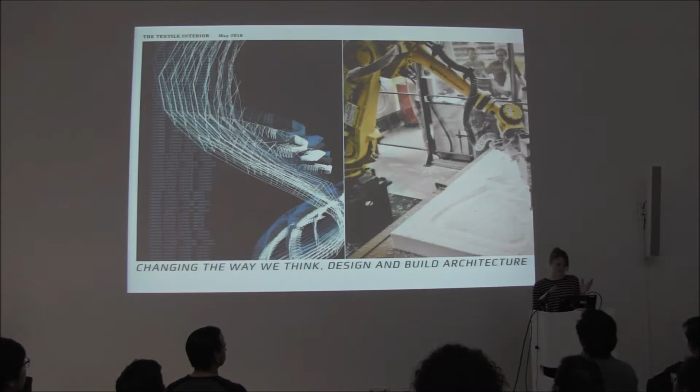What we look at in CITA is how computers are changing the way we think, design, and build architecture. And the thinking part is really important. Often our field becomes very technological, very much about optimization. We are given tools like this. We're shown BIM as a sort of paradigm of just bettering the existing practices.

But I believe that there's much more at stake. For me, we have entered a new realm of representation, and we're standing at the cusp of something that is just as important as the invention of perspective. So in a way we have entered...

Do you want me to go closer, or? Okay, you decide. It's a little bit distracting.

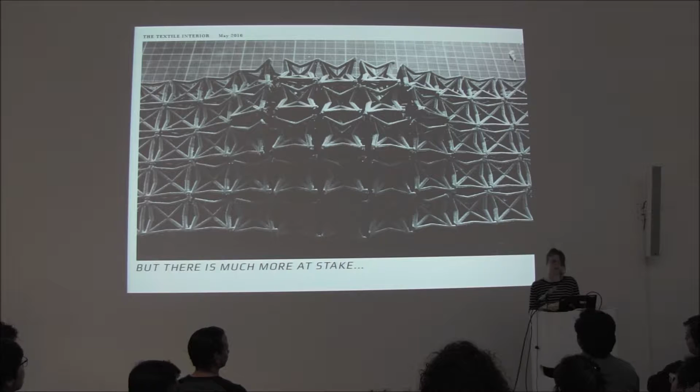But we have entered a sort of period of reinvention of our practice, which I'm personally very excited by. We work in a practice-based research method. We build a lot of one-to-one installations, demonstrators, and this is really through an idea that technology is something we make rather than something we use.

So I believe very much that architects are particularly prone and good at being given a tool and immediately breaking it, finding the edges of it and deciding to misuse it. And I think the only way you can enter those practices is by doing. And so the making practice in CITA has been fundamental to our evolution.

We teach, we do a lot of workshops. In these workshops, we teach the way we research, so we embed students in the same way as our own practice. And we develop questions. Sometimes they're questions we don't know, like, could knitting be an interesting paradigm for architecture? I did a workshop on that 10 years ago, and I've been working with it ever since. But it started as a workshop.

And sometimes it's the other way around. I come with a mature research project, I open it up for students, and I see how students might navigate the same territory of concepts and tools and ideas.

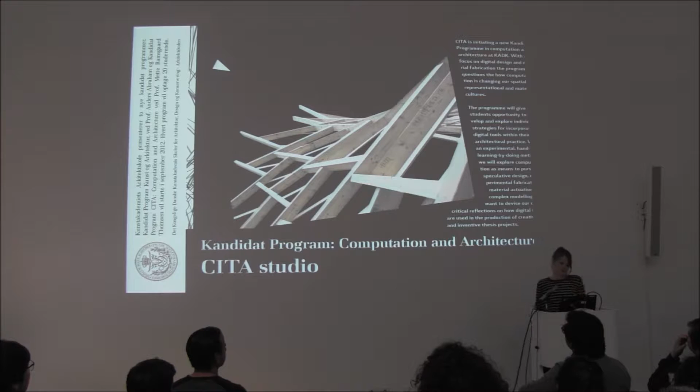We also have a master's program, which I won't pitch here. So anyway, this is a little bit repetitive from the talk in Berlin, but maybe it's a point of departure.

Why this interest in textiles and architecture? Of course you could say there are two central traditions, maybe the tent and the tapestry. The tent as the textile as a constructive membrane, structural skin, and the tapestry as that which lines the space and encultures the space. And these two traditions, I think, are very interesting.

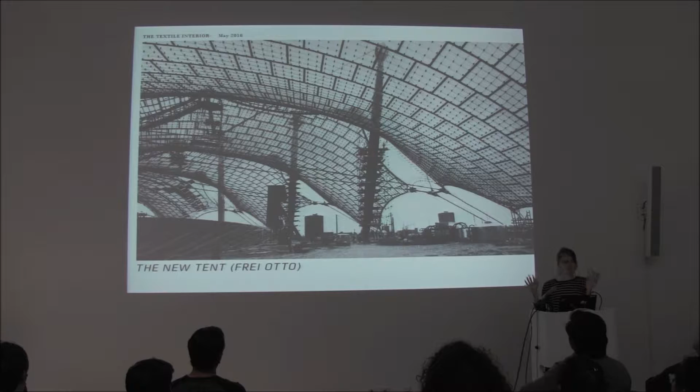We could think of the new tent. How could the tent be constructed today? And perhaps also the new curtain. And obviously we have excellent practitioners working with these ideas around us. For me, a very important interest in textiles is this idea of the tapestry.

So this project, which is ongoing, but maybe I started 6 years ago, started with a trip to the library. I wanted to work with an idea of textile history in architecture, and I thought, I'll just go and find a book which says where I can see all these textiles. And I opened all the books, and I realized, obviously, when I look at Villa Rotonda or Villa Medici and so on, they're empty. There is no evidence of any inhabitation.

And of course I knew this, but I had somehow forgotten that the life of buildings and how we experience architecture is eroded from our architectural history. So in my own little way, I've been trying to construct a history of textiles and architecture, and enjoying thinking about textiles as a particular narrative in architectural history, which is somehow parallel but also introducing other kinds of ideas.

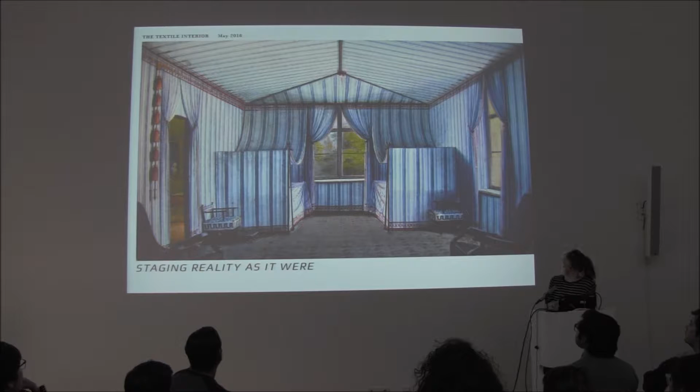They're exotic and scenographic. Schinkel is a really interesting person for thinking about textiles, because with his tradition of thinking about these very large textiles, Schinkel actually visited the coronation in Paris and was very aware of Percier and Fontaine's work. And when he did these textile rooms, which are now very famous, for Humboldt in Schloss Charlottenhof and Queen Louise, Napoleon had slept in her bed. He invaded Berlin, slept in her bed, and when she came back, she thought, maybe I need some redecoration.

I just think that's so, if I'm going to invade a country, I'm going to sleep in the Queen's bed too. Yeah, it's fantastic.

Anyway, so he constructs it as a sort of scenography that we can live in, where we can construct ourselves and our own identity within these spaces. So what I bring with me into these more technological studies that I will show now is this depth of history and depth of architectural thinking, this idea of a transformative space, an architecture which is fluid, that you can bring with you from place to place, and which is rich with narrative and meaning in ways that we don't normally think of when we think of architecture as artifact. So it's this idea that I want to bring with me into these more architectural studies, or technological studies.

So I've structured the talk around these 4 ideas. Textiles as a model for architecture, the idea of a textile room, digital crafting, material design, and complex modeling. And we'll get more and more computational as we go down. So, okay.

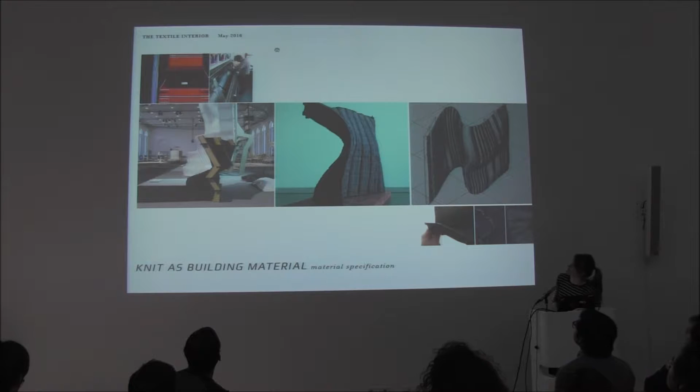And it didn't at all have the sort of textile sort of just pull a bit, and so these sort of questions became very interesting, and with it we were working on these very interesting CAD/CAM knitting machines that I'll show you a few times.

Right after that we won this competition for an interactive show in London, and we said very bravely, well, we can do this, but it will move, and it will be 13 meters long, and we'll do it in 3 weeks. And we weren't really completely aware of the complexity of it, but the idea was that it would move, but at the pace of architecture.

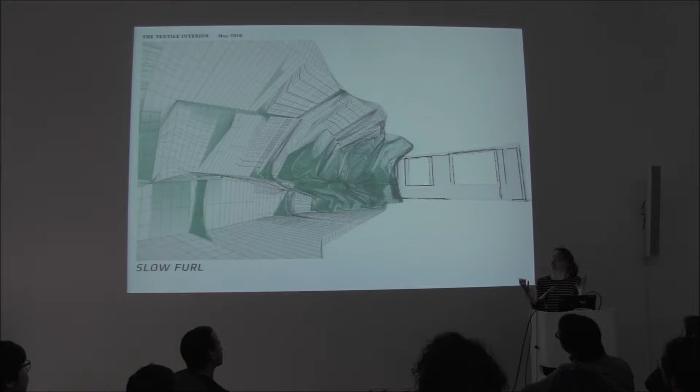So I've been working a lot with actuation and thinking about what would the temporal pace of a building be if a building was an organism. So maybe more connected to the pace of a glacier or a frozen lake; these sort of time frames are beneath our own experience. While we have an understanding of them, they're not animate.

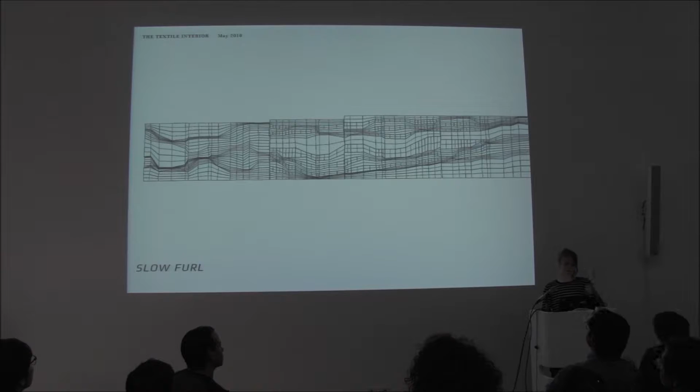So I got these guys in India actually to make me these fantastic geared motors, which had very little power in them, but were geared down to have a lot of torque. And a little bit like a sort of medieval piece of technology, it has these weird arms underneath it that are very basically just moving up and down, but because of the joint system, it becomes a complex movement.

And when we had finished the actual construction, we switched it on, and it didn't work. And it was 4 o'clock in the morning, and the opening was the next day, and we just thought, fuck. And then we thought, okay, there's nothing to do, we have to lie. We'll just say it works. Okay, went home and slept a little bit, and then I thought it works, because I had coded all the motors, and I had been planning, and I knew that it was working. I knew they were moving.

So I crawled in under this thing into this place here, and then I saw it is moving. And it is simply because when you have a rigid architecture, you can see the motors like a clock. You can see the arms moving against each other. But when you're looking at this kind of architecture, with this hyper-voluptuous skin, then we have no registration.

So here I was imagining, how could an architecture be if it was an organism? What would its movement languages be? And here it was pointing right back at me, saying, what kind of organism are you? What can you even perceive? And I thought that was an interesting dialogue.

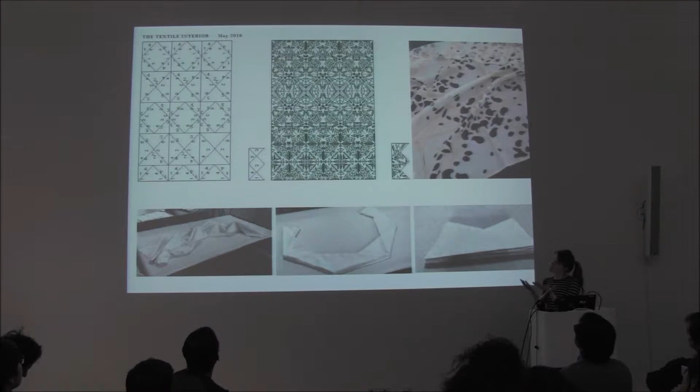Along with it, we did these studies into origami, where we folded the textiles and then created laser cut shibori forms. You know, the Japanese dyeing technique of shibori, where you're binding the textile with blocks and you're dipping it, and the water actually only goes in to the edge of the textile, creating these very interesting patterns. So we found ways of developing this, and then laser cutting the forms and laser cutting the textiles,

and enjoying the dialogues between the technique of shibori, the techniques of 3D modeling and the techniques of laser cutting. Or here in Blush, which also has a very technological study. It looks at, again, 3D modeling flounces. So it's a tablecloth for a very, very complex table. The table has several layers, and the tablecloth weaves in and out.

And then it uses placed patterns, so digital printing of these silk surfaces, in which placed pattern is in fashion, where instead of just striping the textile, you stripe it in relationship to the body, and you use digital printing to be able to make the patterns. There's a picture here. You can see how the patterns are strategically colored, so that within these very deep silk flounces the color becomes really vibrant, but on the outside it's very

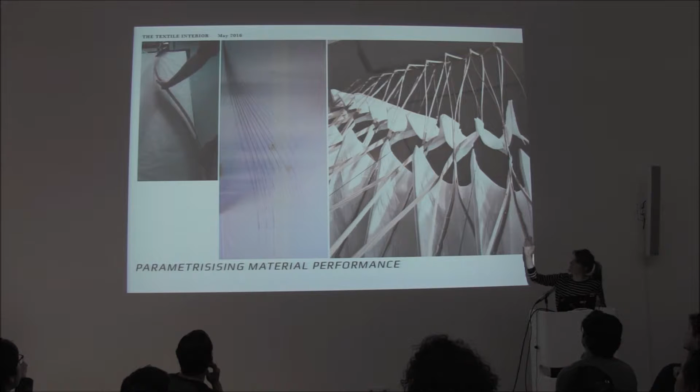But in Thicket and Thaw, what we were looking at is really trying to understand how we could make the subframe also textile. So here, very simply, bending the wood, tracing the wood, and using this as min and max parameters for a parametric model by which we can then design this structure. So we named this kind of thinking digital crafting because it holds the craft techniques and the computational techniques, and it brings these worlds together.

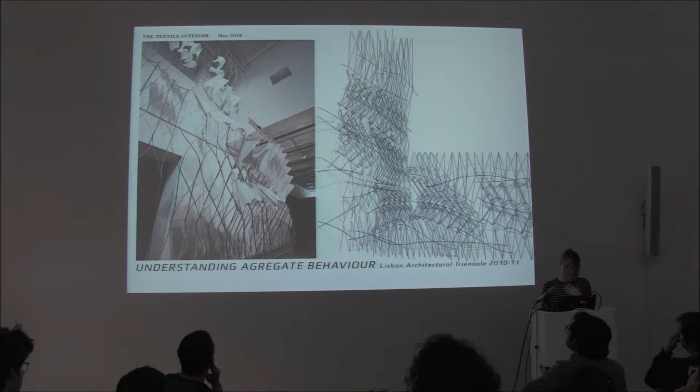We did it again for the Triennale in 2010, where we built it 10 meters high. It was really fun because at 10 meters it suddenly starts becoming not just the interior, but something that speaks back to you as a building. A little bit of digital fabrication.

But what was also interesting was that when we were making the model, we understood, okay, I'm parametrically designing the single curvature of the beam, and I understand how it's moving, and that if I flex it more, it will break, and if it's less, then I'm not using the stiffness that I'm gaining from the elastic behavior. But we also understood there's something happening in aggregate behavior.

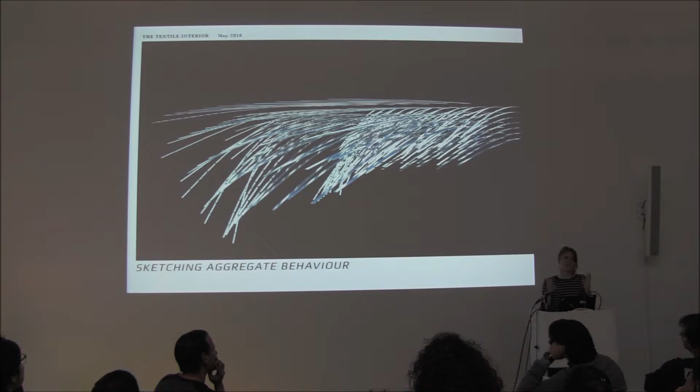So a little bit like building a fence, when you have many members that are all able to bend, then the structure itself also has its own behavior, which is more than, or accumulative of, the many behaviors of its members.

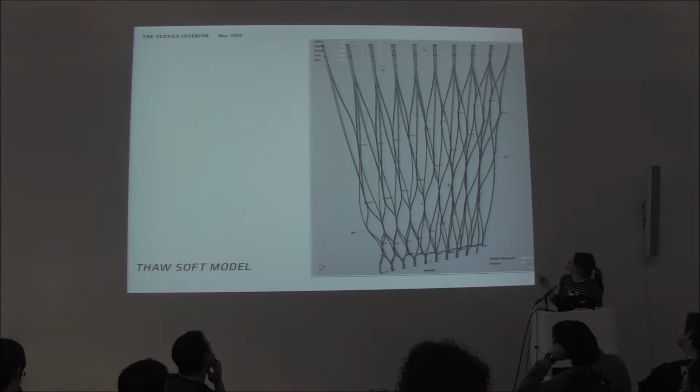Yes. So here, and this is whatever, 5-6 years ago, we were using Nucleus engine in Maya to simulate the behavior of the material. So in our field, this has really changed a lot with Kangaroo, which came after this. There's just a lot of different modeling techniques now to model it. But what we were trying to understand is, what is the movement and behavior of the whole of the structure and not just of the single beam?

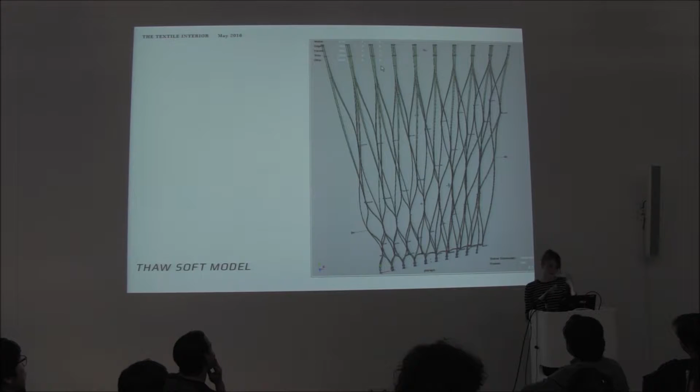And how do we integrate simulation into the design chain, which is a much larger question. So what kind of material simulations do we need to develop to be able to actually think about what kinds of structures we can create in this way?

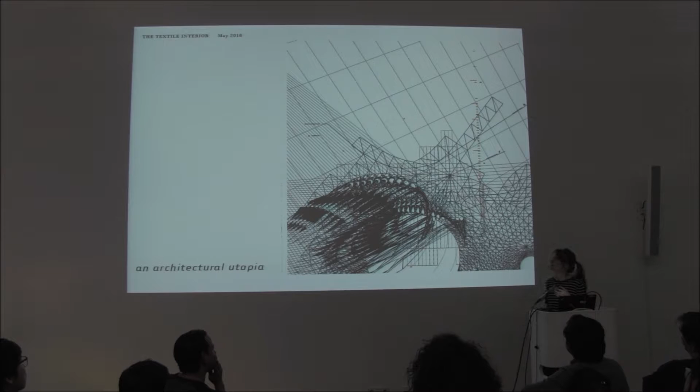At the same time with this, a little bit in line with strange metabolisms, I was drawing these sets of drawings, which was really trying to project, well, what is this? What would it be like to live in this space? So these drawings were part of the Biennale project also, and what we're looking at here is just trying to understand, well, what's the identity and nature of this space? What kind of language are we establishing, as well as a technological construct?

Dermoid inherits a lot of these ideas. Dermoid was done with Mark Burry from SIAL, it's a collaboration between the two centers. What we were looking at here is how we could use short members, so wood becomes more expensive the longer it is, so how we could use short members to make large spans. So here we're using just ordinary plates of ply, 2 by 120 by 240, and cutting them and then weaving them together in a reciprocal truss frame system.

So reciprocal truss frame is a Japanese structural system where you're leaning members on each other. You can imagine that 3 people can sit on each other's lap, and so you have this system that's working with gravity. So this is not a proper reciprocal system because we're lifting it out of the plane of gravity, and you can imagine what's happening with those people. That doesn't work, no? But it still has this woven logic of these members being brought together.

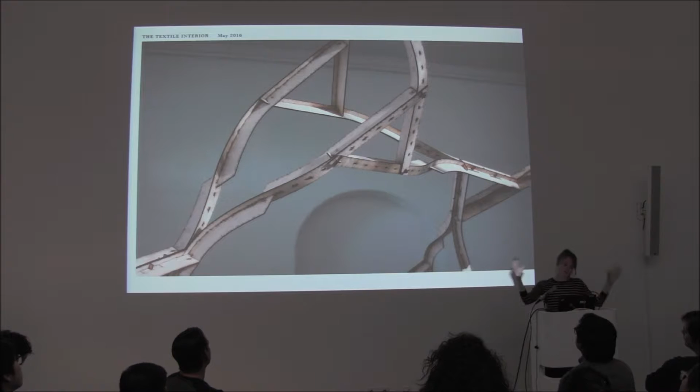And each member is zipped together with, I always forget this, there's a web and a flange, no? Yes, web and flange are then zipped together in a friction-based tie. So what's happening here is there's no glue at all. The whole thing is just brought together like this. And because of the bending, then the thing locks. It's a very simple construction. And it's a way of making a space frame, spatialized members that are then brought together.

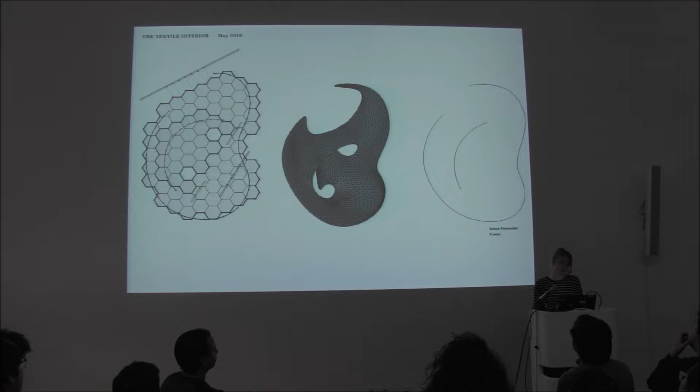Again, we invented these first steps into thinking about what a simulation-integrated design method would be. Here again with Nucleus Engine in Maya, just modeling an inflated bubble that would then reconstruct the topology. Oh, I took those pictures out. Anyway, so that's how it was. We often do our projects many times. We did it again for the Copenhagen Design Week, where we built it for the Design Museum in Copenhagen.

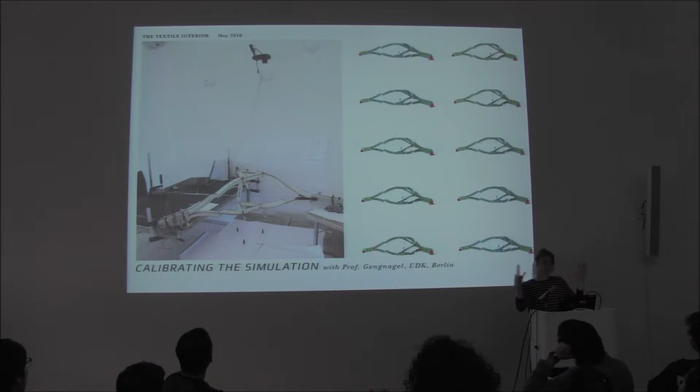And here we then started to look at how we could integrate FE. So FE is finite element analysis, and it's a way of calculating structural strength. What we were doing here is trying to understand the performance of the structure and testing it, and then building a full model and understanding the deflection of the model. When we built it again at RMIT in Melbourne, we then also modeled the full structure as a whole in FE and understood the performance of that.

So these understandings of lightweight and heavyweight simulation and bringing these together, not necessarily modeling the whole thing using heavyweight FE, but rather interfacing between smarter, lighter weight simulation types that are more spring-based and then more hardcore integrations. At the end, we 3D scanned it, and then we correlated the two scans by putting them on top of each other. You can kind of see it over here.

And then we could see, well, the simulation is about constructing an expectation of performance, and the actual 3D scan is what it was doing, and then we could see where the moments are where we're deflecting a lot, and where the moments are where we have very good understanding of structural properties.

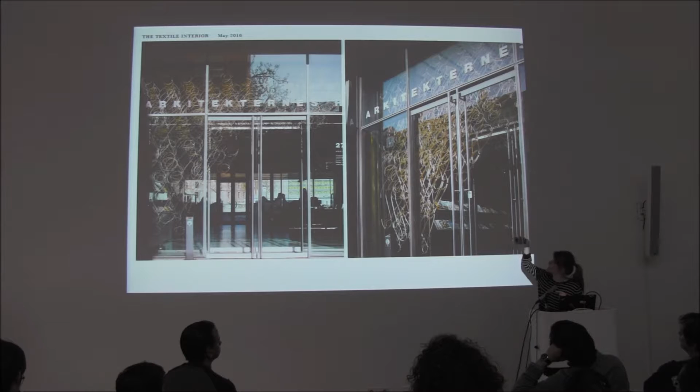The last project in this series is a project that I did for the Architect's House. You can see the curtain, the other curtain behind. But here what we were doing is really trying to understand the systems that we were working with in Thicket and Thaw, and then bringing them together into this sort of textile curtain.

So inspired by other textile systems such as weave or knit or crochet, I was very interested in that these representations that we know from textiles are diagrammatic. They are not representational, or they're not image-based. When you're looking at the diagram, the knitting instruction, you're looking at an instruction, you're not looking at a picture of how the textile will work in the end. And I'm very interested in how we can use these sort of concepts of representation and merge them with our own.

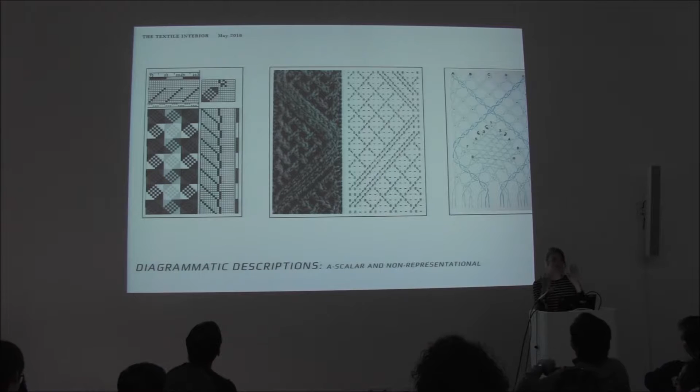So in Shadow Play, what we're looking at here is also trying to understand how these representations can be developed. So here we invented this sort of strange three-dimensional weave system. It's a set of loops. It's set on these bars. The loops are moving downwards and they're crossing in over each other. So they make a 3D textile in wood.

At the same time, what we were very interested in is exactly these drawings here. So how can you represent a material system? If architecture moves from the design of artifacts to also include the design of materials, we need to start thinking about what are the design protocols by which we can understand and develop these materials. And this is in a sort of crude super scale because the stitches of my 3D textile are this scale here. And so it is a diagrammatic project.

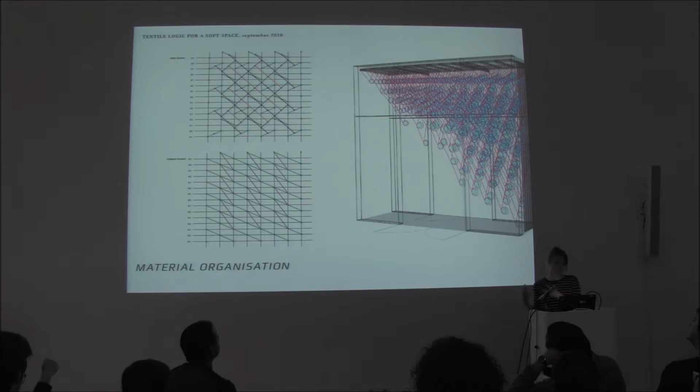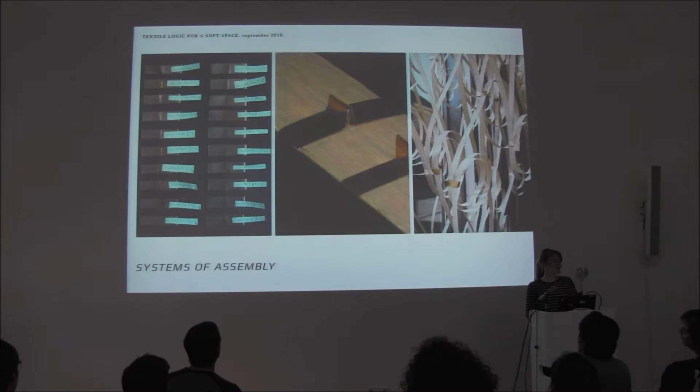And what's interesting is that we are now working with a set of tools which are actually inheriting a lot of the logics from these much more early sketches around trying to understand what our representations need to convey in order to be able to develop materials. So yeah, it's a little bit of how did we do it, cutting up slats. Big interest in copper ties. The whole thing was tied together with these copper ties which reflected the light and warmed it, and a bit of design. So this question about what happens when the architect becomes interested and engaged in the material scale has been really important for us.

Of course, you can say that digital fabrication tools are not really bringing something new to the field, no? A CNC milling machine is just a milling machine with the computer stuck onto it. Maybe laser cutting is a little bit new, but it's not so new from cutting. So it's not really the tools that are new, it's just the level of address that's new. The idea that we can bring in a whole new degree of complexity. Maybe if you were some sort of Japanese master builder and you had 20 years to do something, you could also reach this complexity. But in our building culture around us, we rarely touch material in this way. So,

of course, if we look around us in the field, there you have 3D sails, or North Sails, this idea that you could make materials that were optimized for a particular use. So you could have a set of tools, you would have simulation of wind loads, simulation of performance, and to that you would be able to build a particular material that is structured in such a way that it would work. And now I'm talking as if I'm assuming you know what this is. Do you know what this is? No. So what it is is a 3D sail.

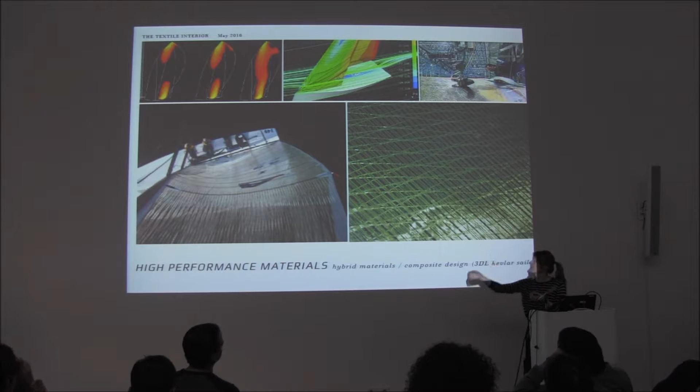It's woven on these huge, you can kind of see it up here, robotic tables that they can level so that they are exactly in the three-dimensional shape of how they expect the sail should be set. And then they laminate with this robotic head, you can see here, across the surface, and they make a material which is directly linked to the particular impact that they're expecting on the boat. So it's a sort of hyper-performance sail made for like America's Cup or something.

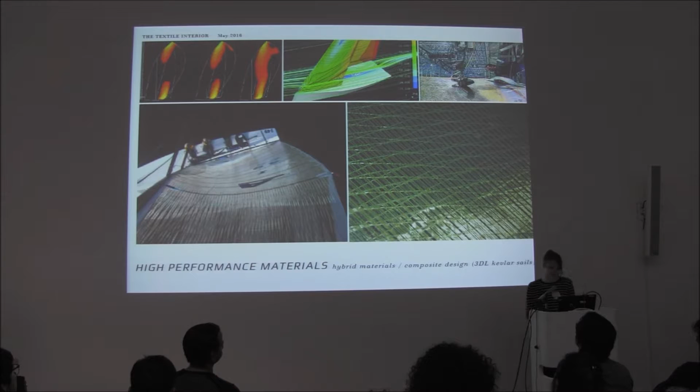So you could say in architecture, why would we build like this? But I think as we get into a culture which is much more aware of the economies of fabrication and the economies of transportation, this idea of a lighter building culture is definitely something we are going to be working with much more readily.

And then the sort of quip of Bucky Fuller, "Mr. Foster, how much does your building weigh?" takes on a new meaning. He didn't mean that when he said it, but it's still a very, very relevant question for our time. So this idea that materials could change properties, could grade, and could change according to site or use, I think is really inspiring.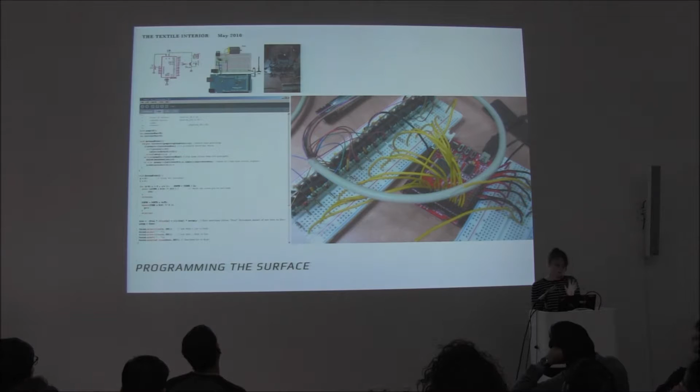But much more importantly, it became about how to interface the Stoll machine directly from the CAD environment. So we drew these diagrams. And the diagrams are setting the relationship between a cell matrix, which then allows us to construct the actual code that runs the knitting machine. So every cross point in this diagram is generating a new set of information that generates each of these changes between the commas in the code.

So what's exciting for me in this project is that we're able to directly bridge between the architectural design environment and an environment for materialization. We've done this several times since then. We have different interfaces, sometimes a TIFF interface where we're building pixel-based images, and sometimes these codes, and sometimes with Shima Seiki and sometimes with Stoll. But this idea of being able to directly design the materials and knit them, sort of like printing them, is really interesting. So you can see there's a lot of information passing.

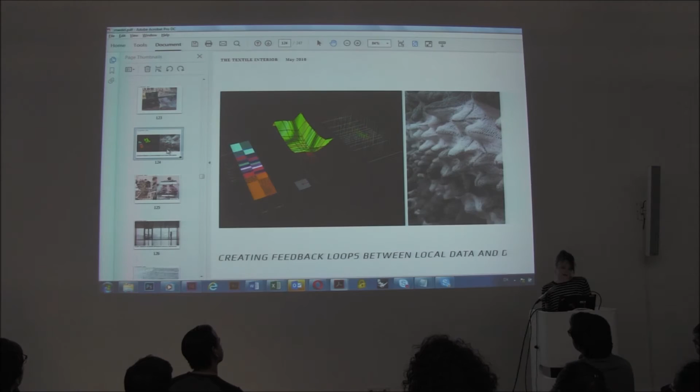In Smart Geometry in 2011, we brought these ideas with us, and we looked at how we could test these materials and try to instigate a new kind of design chain. So rather than being interested in smart textiles and actuation, the interest was how we can use the surface to gather information about its environment and then feed it back into the design chain to make the right kind of textile. So how do we use it for material specification rather than for actuation? So here we have strange feedback chains between prototypical materials and more realized, final materials at the end.

This was brought together in Sifter, which we just finished this spring, which is a curtain again for the same house, where we looked at using sensors, here light sensors, from an environment to generate a site-specific pattern, a curtain that sifts in the light according to the light input. So we're generating these huge data sheets where every green little cross is a light sensor. We made a reading of 8 hours on one day. That could have been better, but just to prototype it.

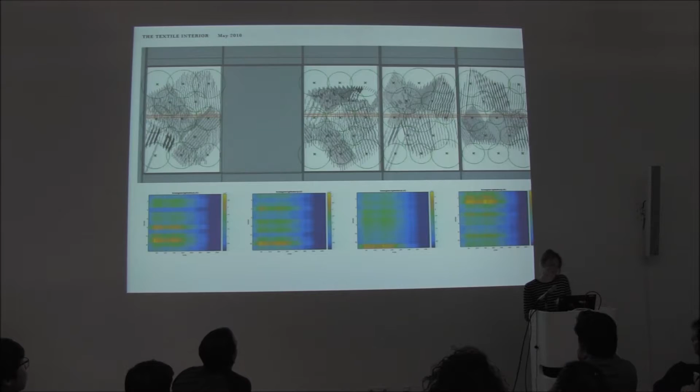And here you can see the diagrams of each of the sensor fields, what they are reading. And then we used standard deviation as a way of calculating difference rather than average, to understand how we could use these sensor inputs to distribute material across the surface to create a curtain that drew light in where it was dark and was more dense where it was light.

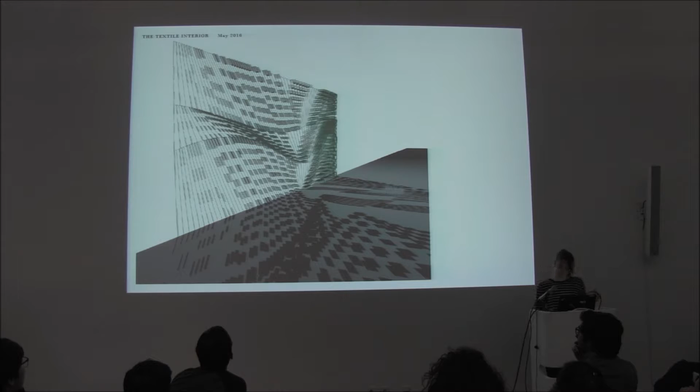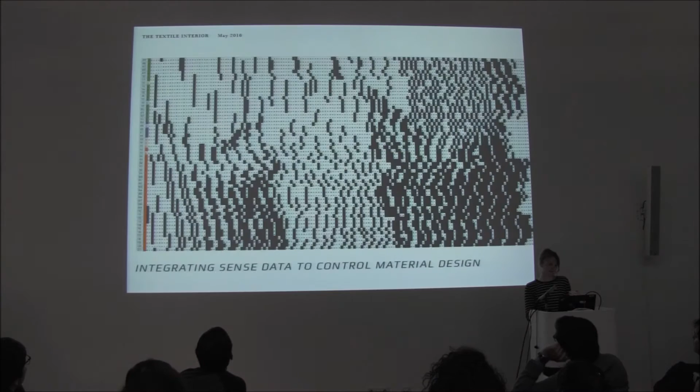So again, it has this diagram as the interface. And here I've inverted the pictures, so this photo is the same as this one, but here it's very hard to see. So when I invert it, you can see the reading of where the material is more loose and where it is more dense, according to the sensor feedback.

So this whole idea about what are these new material practices? How do we design with them? And how do we inform material practice, I think is really interesting. Simulation is one way, no? We can simulate how materials work, we can get knowledge about it, and we can start designing materials smarter. But sensing is another way.

So sensing is understanding a particular local environment, whether it's within a material or within an environment, and then bringing that information in to be able to make material specifications. Here, this is a little experiment we did with Azam Khan in Copenhagen. He's the researcher at Autodesk, where we embedded, so these are sort of fiberglass tapes, and then we embed little pressure sensors. They're just actually carbon fiber, and if you bend it, there's more pressure, so they're more conductive. And then they're less conductive.

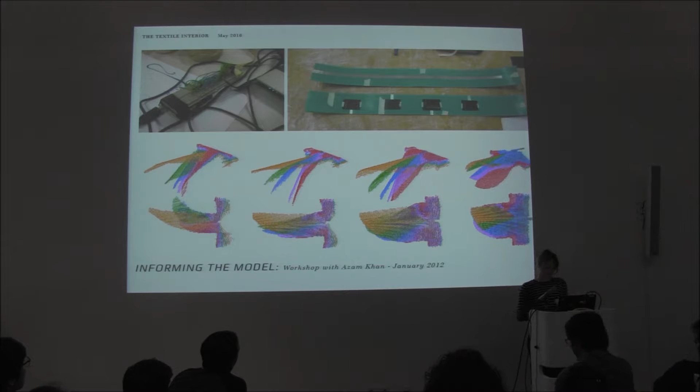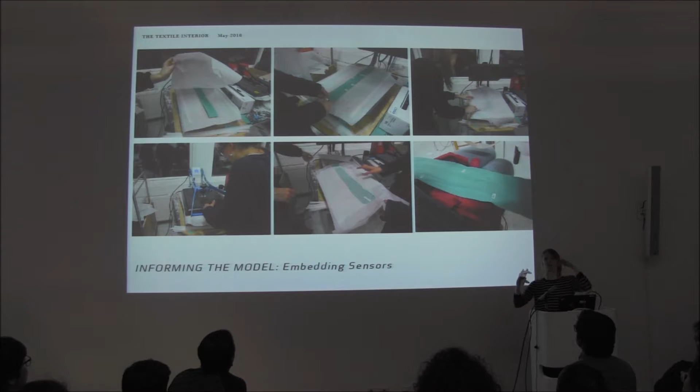So we can sort of read how the material is moving as it's actively bending in the construction. So here we are baking our own element in a sort of t-shirt heat press to then actually interface it with the 3D environment. I think what's interesting about this is right now they're prototypical processes, they're a little bit far-fetched and they're separate. But the point is that they should be brought together. So we should be doing design that has simulation integrated into it, and we should be using sensors within the environment and within the materials to inform those simulations. That's my sort of end game on that one.

I'm just going to skip a little bit in the interest of keeping everyone on their toes.

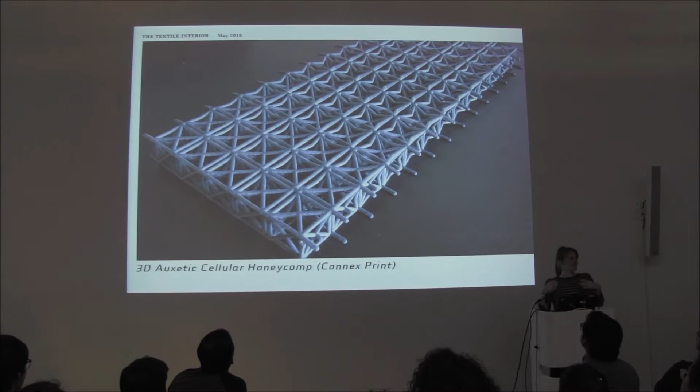So the last set of projects I want to show I'm calling complex modeling. Complex modeling is a larger project that we've been working on for the last 3 years, and will be working on for a year more, which looks at this relationship between material design and structural design. So right now, as a practice, we're really good at understanding what's going on at a structural level, also really good at understanding what's going on at a material level, but we're not very good at understanding the relationship between the two. So this is a phenomenon called multiscale modeling.

Multiscale modeling is an interdisciplinary research topic. Economists, sociologists, meteorologists, material scientists, mathematicians are working with this idea of having many different models that are then interfaced. So you have a large model that is being parametricized and understood by a small model. You have a small phenomenon, a little area of a landscape. You model that, you extrapolate data from that, and you parametricize the large model. So normally, the mesoscale, the scale in between, is an abstraction. It's something that you put into place to be able to interface the two.

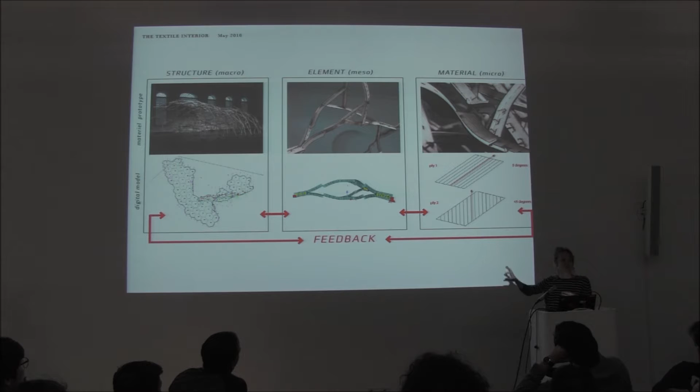But in our field, and I guess any design field, but especially architecture, it's very, very rich. We know a lot about the intermediate scale because the intermediate scale is detailing. And we, as architects, know in our backbone that the way we work with materials fundamentally changes their performances. So rather than being an abstraction, it becomes a very, very rich territory, and I think that's very exciting. So there's 6 projects altogether in the project, and we're doing the last 3 now. The first 3 are here.

And what we're trying to do here is, well, if all the projects until now have really been about, okay, there's a material practice, and how do you use computational modeling to understand or enrich that material practice, then what we tried to do in this project is turn the question upside down and say, well, if we start from computational, if you start from representation, what kind of representations do we need to set into place to be able to work with materials smarter? So in a way, the projects are very similar, but for us, they're sort of the other way around.

This is the RISE, which we built for the EDF Foundation in 2013. It is a little bit different from the other projects. The other projects always try to be like a cantilever or a wall, they relate to something. But here it's like a bush. It's just a big mass of material. And if we were going to look at advanced computational modeling, we wanted to start with something we knew was very tractable. So we started with growth algorithms. And what we looked at here is understanding how a building might grow, or how could we think of a material system as growing.

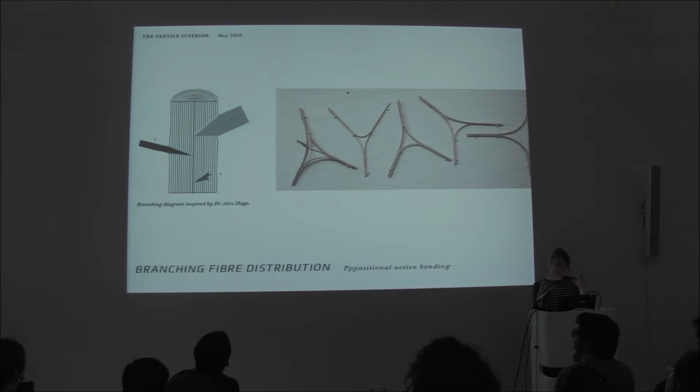The project's built of rattan. Rattan's very fashionable now, but I didn't know it when we started this project. It's a material which is very fibrous. It's a wood, like a liane. And it is made out of these like straws, so it's very, very bendable, yet very, very strong in that direction. It's traditionally made to make furniture. And then we had this idea of bundling, a little bit like the fibers in the tree, that they are bundles of fibers. We would make bundles of rattan elements that are brought together.

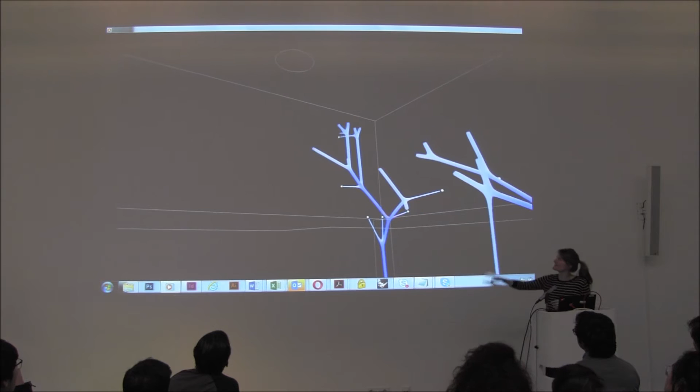So I'll just show you the model again. So with an artificial sun, which was just a point, we then grew these structures. They're growing and finding their way and relating to the environment, shooting off branches that can, through thigmotropism, join to the building, and also having an understanding of self-weight and the necessity to shoot off branches that construct support underneath them. As you can see, they're also joining to each other. So it's kind of growing this structure all together.

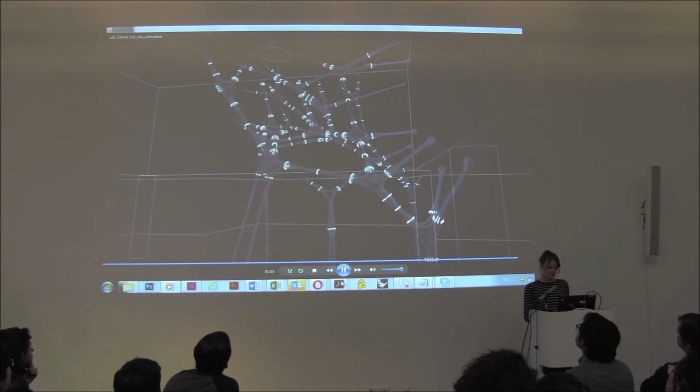In the first phase, it grows the structure. In the second phase, it then develops the actual fabrication. And you can't see that now. It's beautiful. Anyway, let's see a bit now. So it sort of grows the actual material specification of all the joints and systems of these bundles.

So in many ways, the rise is an abstraction. It's not really architectural. It doesn't really want to construct an architecture. But at the same time, it's very much the invention of a new kind of material system that tries to use another way, another logic of assembly and specification.

In Learning to be a Vault, I'll go a bit fast over it, but it was David Stasiuk and myself that did it. It looks at machine learning. So machine learning, I don't know how many of you know what machine learning is, sort of the paradigm for understanding big data. And it is the cutting edge of how we're going to work with all this data that we get from Google and whatever. So it's a very important paradigm.

And in my time in computation and architecture, I've seen at least 3 or 4 sort of rises where people did the great project on machine learning and then everyone forgot about it again and then everyone jumps on it again. And the point is that it's an analytical tool, it's not generative. So it's very good at understanding a lot of data and being able to analyze it and categorize it, but it doesn't have any generative mechanism in it. But it's a very, very interesting set of algorithms around it.

What we were doing in Learning to be a Vault is really just to try to understand what kind of algorithms are out there and how can we actually include them into design. So what we did in this project, we collaborated with IAAC and with the students at IAAC. We got them to build a huge amount of rattan models. So we gave them criteria, we gave them a site, which was a plate of wood, and they could construct these rattan models.

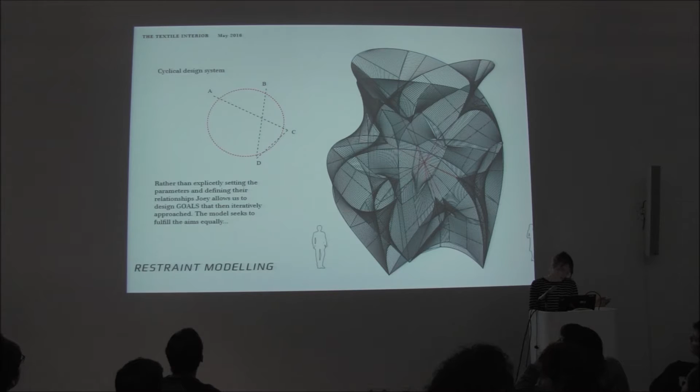So the second project in complex modeling is Tower, and here again it returns to textiles and knitting, but more to the story of the tent rather than the story of the lined interior or the tapestry. And here what we were looking at is really a hybrid structure which allows us to reinforce a membrane structure. So imagine that we're using the active bent fiberglass rods, a little bit like the rattan, and bending that, and then stretching a canvas over it, but also tensing the textile so that the textile also has a performative role. It's not just cladding, but it's also in a tensile system.

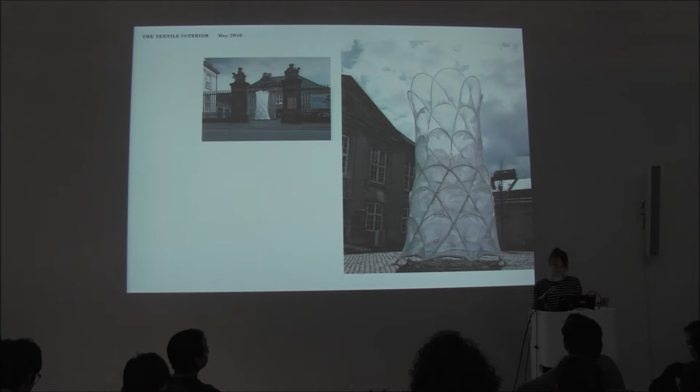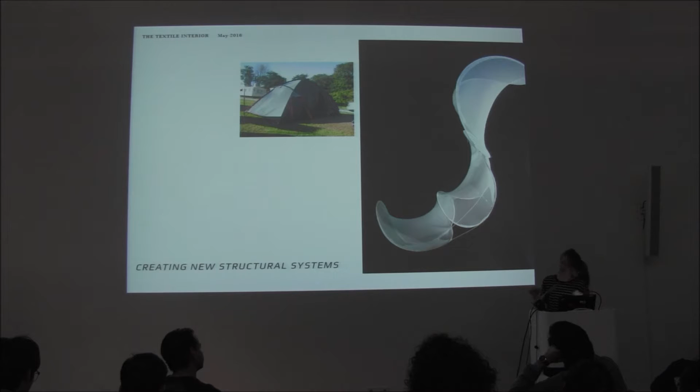What we're looking at here, we started with a series of interest in distributed systems, but ended up in something which was much more globally oriented. So it's a little bit like a pop-up tent. You have the rods and you have the textile, and you know that when you throw them out they sort of pop up themselves. That's because the relationship between the performance of the active bent rod and the textile is in balance.

So what was interesting for us is that when we're working with integrating simulation, we only really have two systems. We can simulate very well things that are either in tension only or in compression only, but it's very hard to do things that are interacting between the two. And so our aim for the project has been to develop a design tool in which we can have more than one material performance and understand the interaction between them.

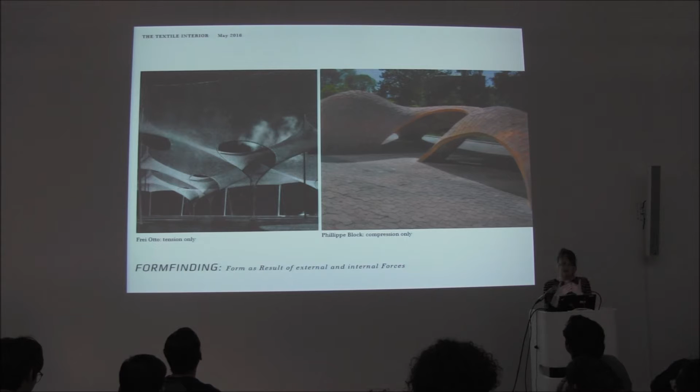So a design aim was to build a 10-meter high tower outside that was going to bend in the wind. I don't know who invented this. It was a very, very difficult design ambition, but that's what we said we wanted to do. So we had this idea of a resilient tower that could bend and deflect and then recuperate actively.

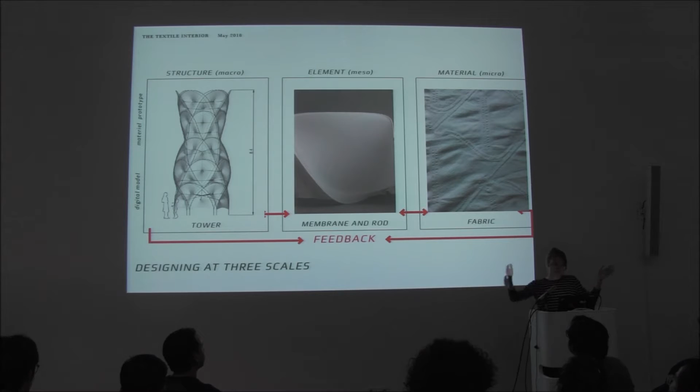And as a complex modeling project, we're designing at multiple levels at the same time. We're designing the structure, we're designing the fabric, and we're also designing the relationship between the element of the rod and the textile system. So we're engaged in all the levels of designing.

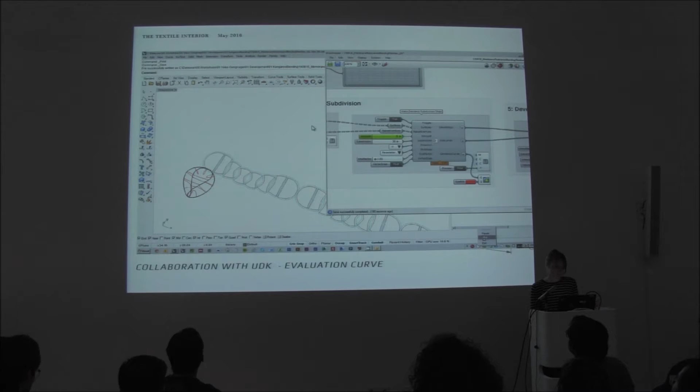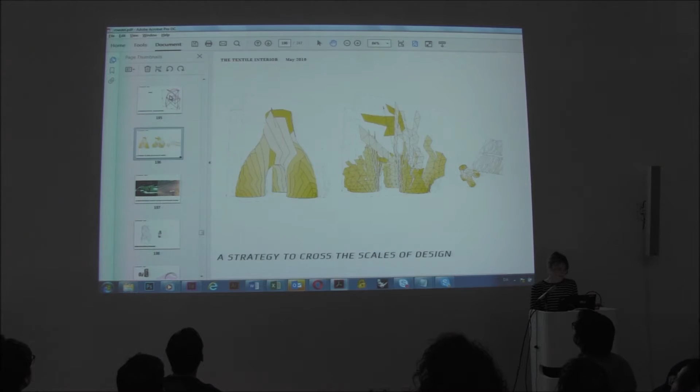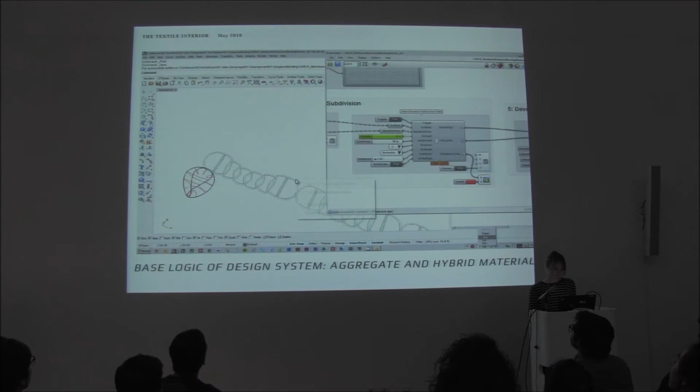Just keep it a little bit shorter here. Sorry. That's a bit too fast. Here we go. I never understood video and restarting in PDFs. Yeah. I might just restart the. Sorry, guys.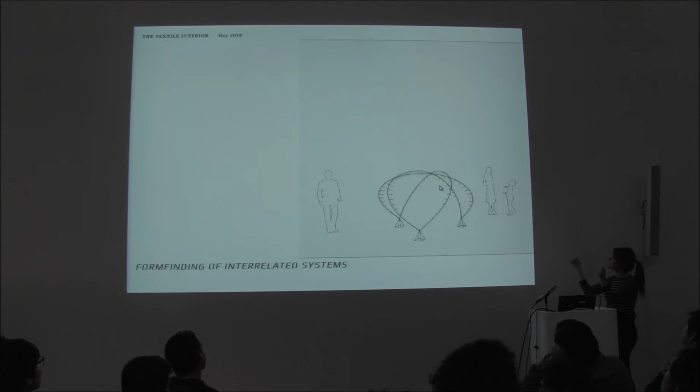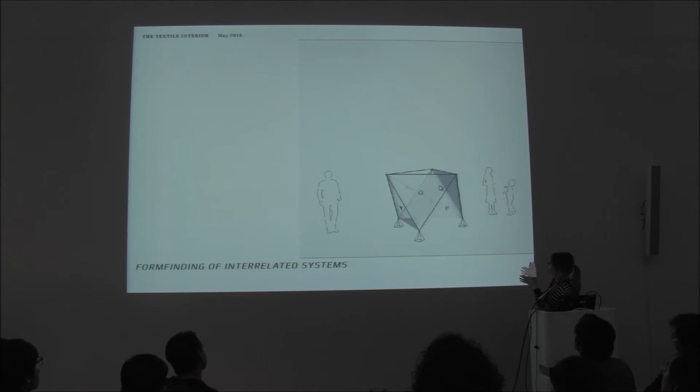So what it's doing is, you see you're simulating the bending of the beams, and you can see these little lines, they're sort of indicating the extrema of the beams. And then we put on the surface, and we can also simulate the relationship between the knitted membrane and the actual bending of the beam. And then it's a sort of multi-story system which is built up.

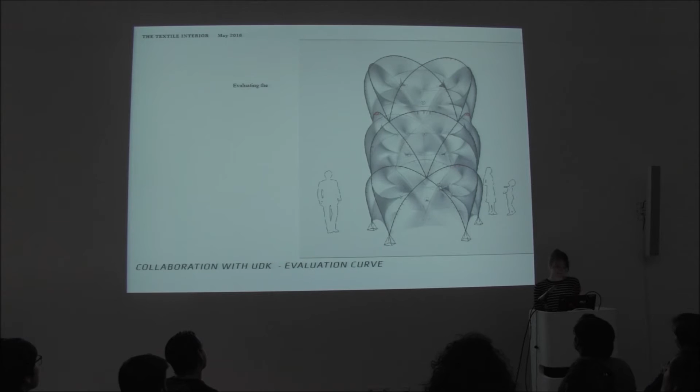What's exciting for us in it, it really doesn't want to play with me at all, this thing, is really to try to understand that normally when we build membrane architecture, actually the making of the seams is not at all an architectural concern. It's done by the engineers. And of course, it's incredibly important for the look and feel of something. So we were interested in being able to design both the membrane, the cutting patterns of them, but also structurally design them so we understood what the performances of them were.

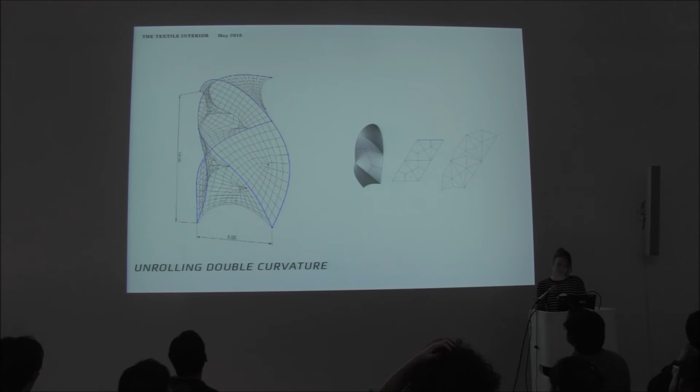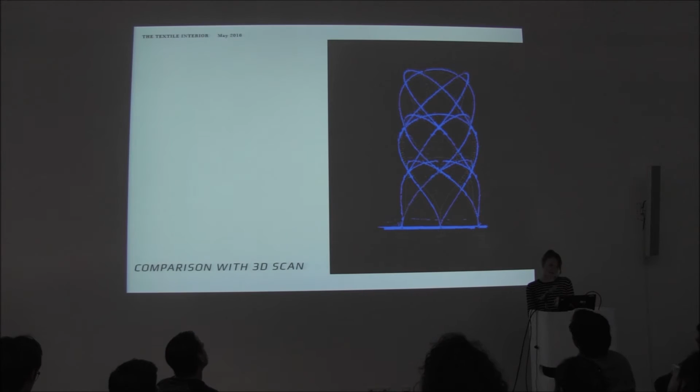So here we then invented our own relaxation algorithms to be able to understand the planarization of them. And here we're testing them, 3D scanning them and understanding the relationship between the two. And then here, knitting the actual material. So again, on these CNC machines, the reason for working with knit is that we can integrate all the detailing. So rather than having to sew all the pockets and so on for the channels, we actually knit them into the textile directly.

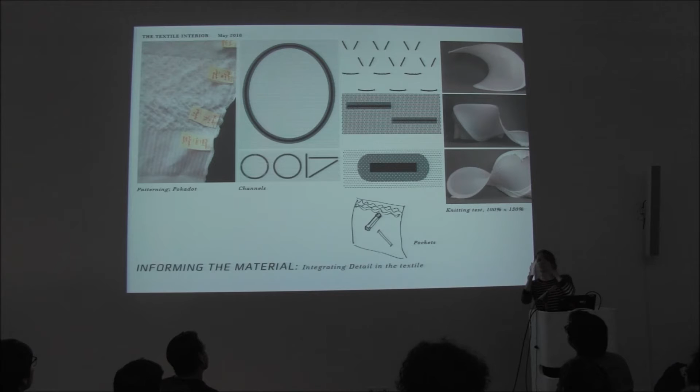So a series of test pieces looking at this. We worked in polyester, high tenacity polyester. This is the actual developing of the knitting system and the testing of it. We're doing this again right now, testing this knitting structure. There were no paradigms for doing this. All the textile testing is done on weave, and knit is much more stretching. So we had to sort of reinvent how you could even do this,

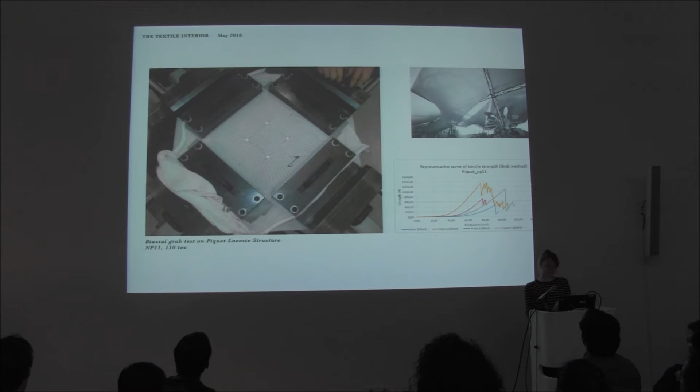and then integrating that into the actual knitting. I'm a little bit sorry, I'm a bit fast, but maybe we can see it here. So all of these pockets and reinforcements are built into the textile, and all the seamings, also eye holes to be able to sew the structure together. So this sort of integrated design, making multiple levels at the same time, has been really the interest of it.